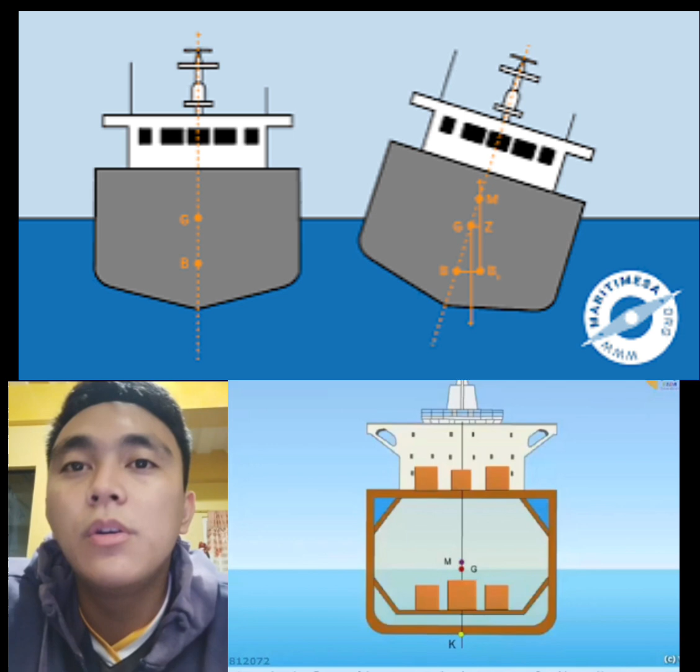The ship's shape and weight distribution must be designed to keep the GM positive even when the ship is loaded or partially loaded. So, we will talk also about the stiff and tender ships. Stiff ships refer to a ship that has a large metacentric height. It is caused by the KG being too small.

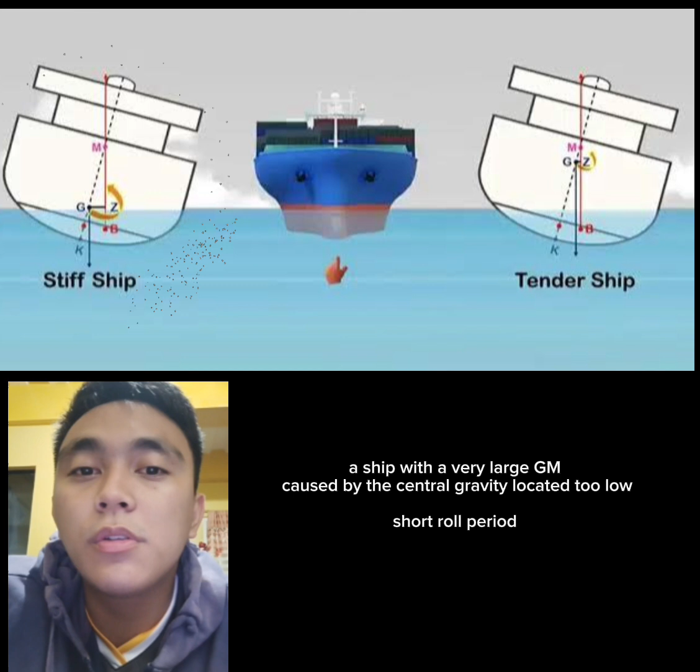So, stiff ships have a short roll period, sometimes as low as 8 seconds, and it can be uncomfortable for passengers due to jerky motion, and it can also strain cargo lashings and damage the hull.

While the tender ship refers to a ship with low initial stability due to a small metacentric height. So, it is caused by the KG being too big, and it has a long roll period, sometimes as long as 35 seconds. It can be sluggish and slow to return to upright, and it can roll over to large angles of heel. So it can also strain cargo lashings and increase the risk of cargo shift.

The second one is the unstable equilibrium. So a ship is in unstable equilibrium when after being tilted slightly, it continues to tilt farther and potentially capsizes. So when the G is above the M, it is considered to have a negative GM or negative initial stability.

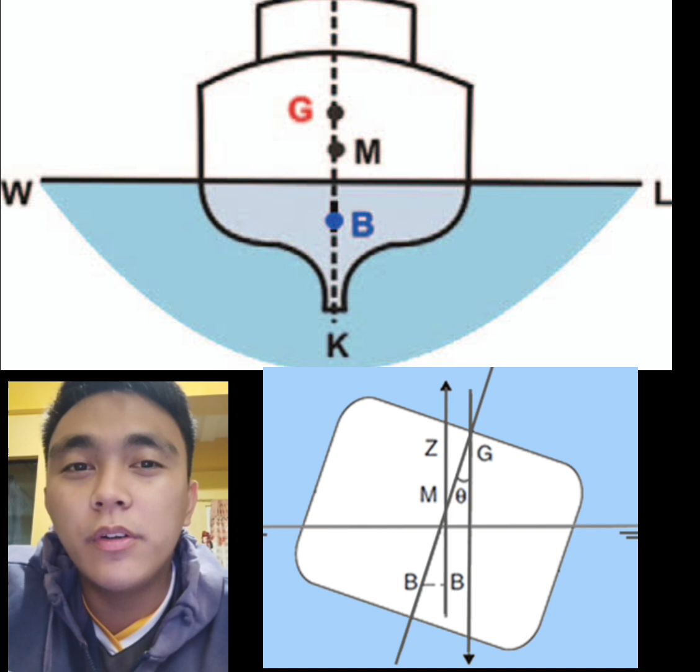So considering that the GM is negative, the GZ or the righting lever also is negative, which can also be called the capsizing lever. So it does not have the righting lever to tilt the ship back into its upright position.

And associated with the negative GM is the angle of loll. It refers to the angle to which a ship will lean to one side when it's in a state of unstable equilibrium. It can be found in the angle of the center line and the vertical line of force.

The third one is the neutral equilibrium. So, a ship in neutral equilibrium is a delicate state where it remains at whatever angle it is tilted to, neither returning to upright nor continuing to tilt further. It can be considered neutral equilibrium when the G and M coincide or GM's value is 0.

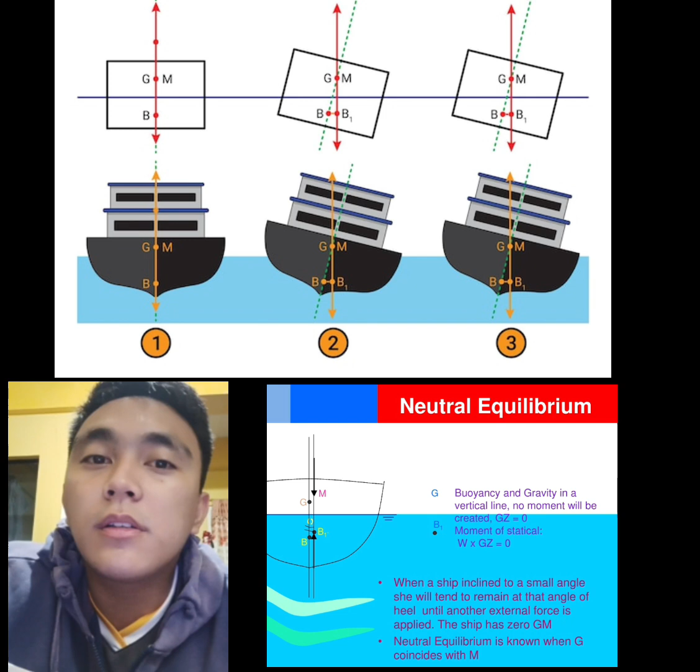So, there is no returning force to bring the ship back upright, so the ship will simply stay at the angle that it was tilted to. And when an external force is applied to a ship, a stable equilibrium means it will right itself and return to its upright position after the force is removed.

While an unstable equilibrium means it will continue to shift further away from its upright position, and the neutral equilibrium means that it will remain at the new tilted position once the force is removed.

So among those, the key factor in determining the stability is the relative position of the ship's center of gravity and its metacenter, with a stable ship having G below M, the unstable having M below G, and neutral having them aligned.

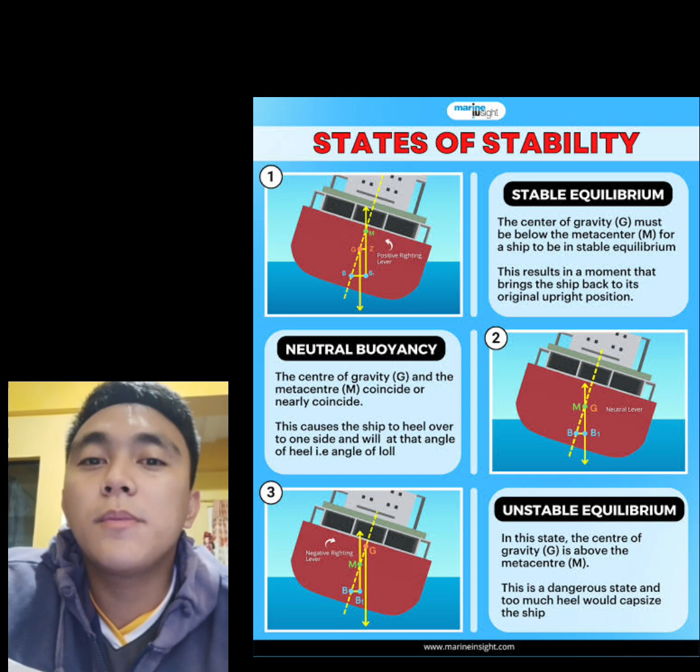So in the maritime context, it is very important to have and maintain positive stability, because positive stability is essential for safe ship operation, since it ensures the ship remains upright, handles well, carries cargo safely, provides a comfortable ride for passengers, and improves operational efficiency.